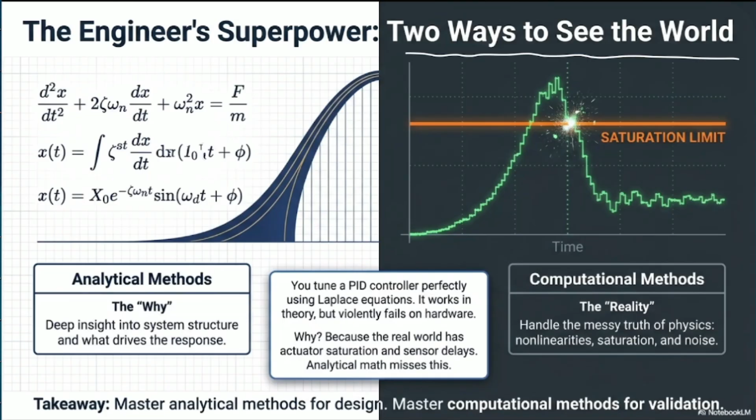So as I just mentioned, in this chapter, we would like to talk about the superpowers. We would like to see the two ways that we see the world. If you guys remember, in the previous chapter, we talked about the time domain that most of the time we don't like, because it leads us to computational mathematics, and we would like to move to the frequency domain. The reason we do that is because it's simpler, and if we have a couple of systems working side by side, we can deal with it.

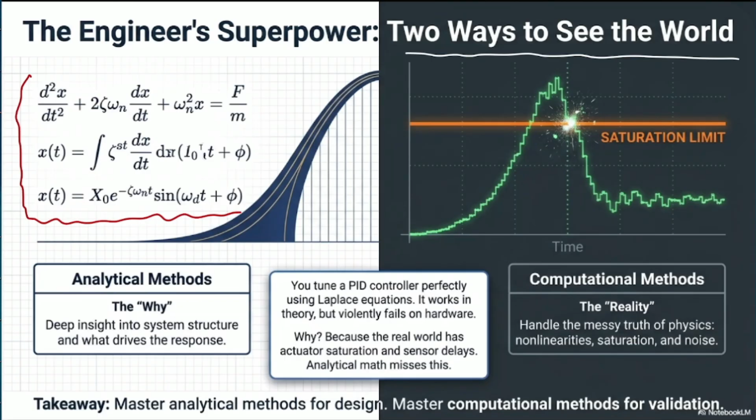After some point, we saw that we had some limitations, especially when trying to implement it in the real world. We had saturation problems and so on and so forth. So in this chapter, we are going to dedicate much time to that. Again, let's have a little review. Why do we use the Laplace? Because the Laplace was actually a wormhole.

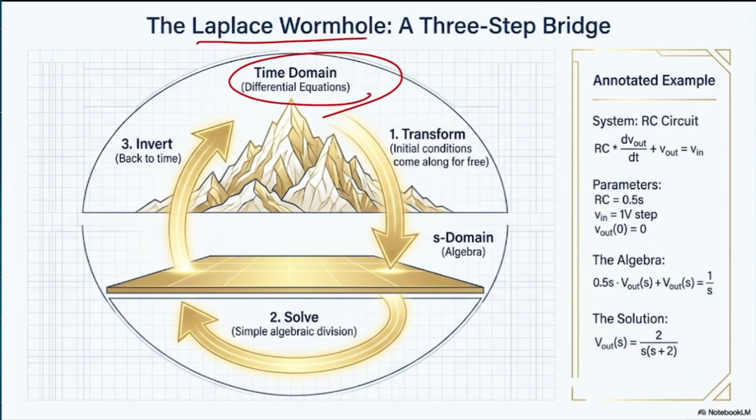It means that at the beginning, we had the time domain with the differential equation. We saw that everything was challenging, so we have to use the transfer function. For the transform method, we consider that initial conditions come along for free, and then we move to the new domain that we call the S domain. So at this point, instead of using calculus, we are using algebra. And then we solve it, which means we are trying to find the relationship between input and output. And at the end of the day, we still have to go back to time, because we have to see, based on the inputs, what I get for my output.

The very simple example was the RC circuit. If you guys remember, the relationship between input and output was something like this: R times C times dVout/dt plus Vout equals Vin. For our parameters, imagine that RC is 0.5, Vin is 1 volt, and Vout is 0 as an initial condition.

So for the algebra, we have to convert this using the Laplace transformation to the S domain. So at this point, I have 0.5 times S Vout(S) plus Vout(S) equals 1 over S. So I know that Vout(S) is going to be 2 divided by S times (S plus 2). So based on a specific input, which at this point was only 1 volt, I know that Vout is going to follow this one.

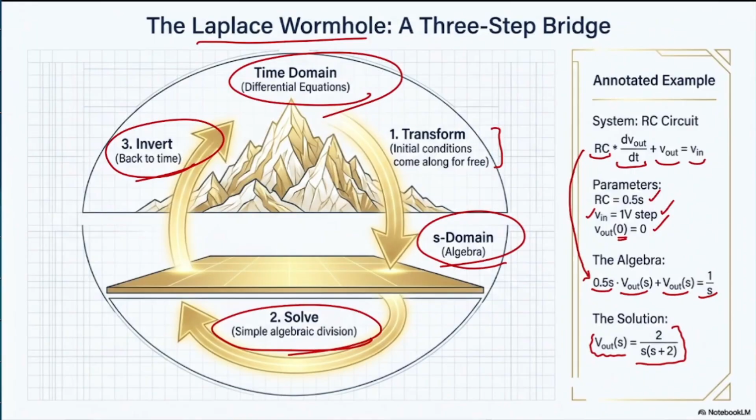So if I would like to talk about that a little bit more, I have to see what would happen to the math, because we saw that we solved V out in the frequency domain, but I still need to have it in the time domain, because the time domain gives me the whole diagram itself, and I can understand what would happen to the rise time, the steady state time, the overshoot, and anything else.

So the math over here was that V out equals 2 divided by s times s plus 2. This is going to be partial fractions. It means that if I would like to convert it to a form that I can convert back to the time domain, I have to divide it into 2 fractions. And when I do that, you guys know that 1 over s in the frequency domain is 1 in the time domain, and 1 over s plus 2 is e to the power of negative 2t. So, based on the input of 1 volt, my V out is going to be 1 minus e to the power negative 2t.

So based on the RC circuit, we know a couple of formulas: t of 0.5 second is considered 1 tau, because tau for the RC is just RC itself. And after 4 or 5 tau, the capacitor voltage is going to reach its maximum. So the insight from this diagram is that 3 lines of algebra precisely reveal the 2 seconds settling time. Imagine that in this scenario, instead of having the RC as 0.5, I have the RC as 1.

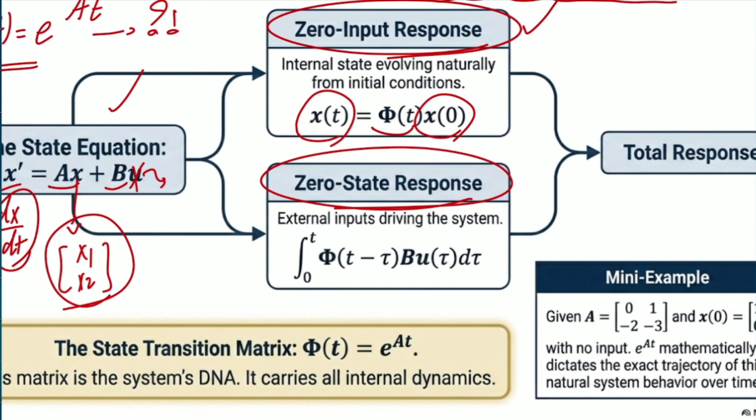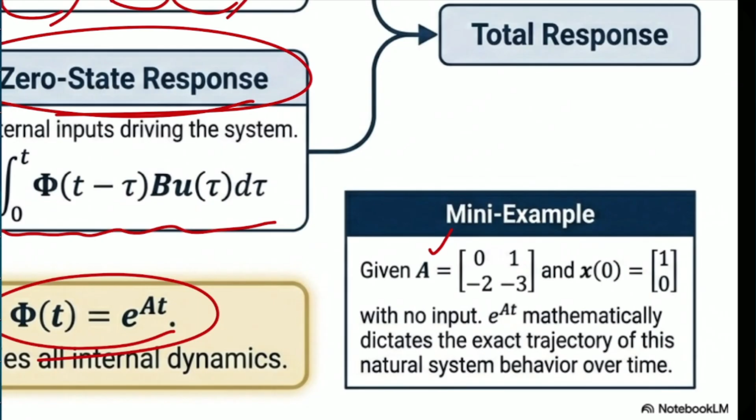And if I assume the zero input response, the part of my e^(At), or the part of my state transition matrix that we know as this guy, can just be calculated like that. So imagine that I have an example, and in my example, the matrix A, or the DNA of the system, is 0, 1, -2, -3, and I know that the initial state is going to be 1 and 0. So at this point, we would like to find e^(At), and let's move forward.

So in this kind of question, the very first thing that we have to do is to find the eigenvalues. If you guys remember, when we have the matrix, our eigenvalues are going to play the role of poles, just like in the S-domain function. We are going to have lambda 1 and lambda 2, which again play the role of the poles. So how can we find that?

It's simple. The only thing that you have to do right now is find this matrix, which is A minus lambda times I. A is the matrix that we have. There's no separate lambda 1 and lambda 2 here, because if you do the next step, lambda itself is going to enter a quadratic equation, and then you have two lambdas. So lambda, 0, 0, lambda is like a diagonal matrix, and it's the combination of lambda and I. I is just the identity matrix, and by multiplying these two, I have that guy.

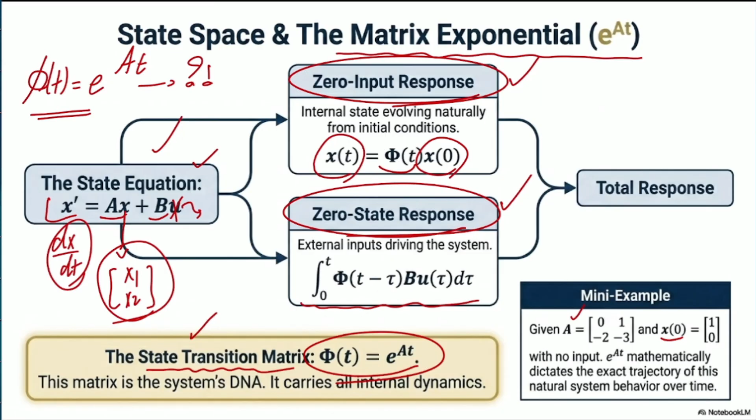Let's again look at the question. At this point, we would like to find the matrix exponential, or the state equation. Based on the superposition, the zero input response, and the zero state response, we can find the state transition matrix, and we can use it to find x itself.

So this way, you can again reach the place where you have the 2 by 2 matrix, and for each entry you're going to have one fraction. Since you have one fraction, you still have to convert it into two fractions for each of these. And then when you have your s response, you can simply find your time domain response. So again, with these two ways, we're looking at how we can use the normal time domain way, or use the s domain.

To the time domain, as you can see, the Laplace would be a little bit faster. At this point I had planned to solve it for you, but I believe it's not that challenging and hard.

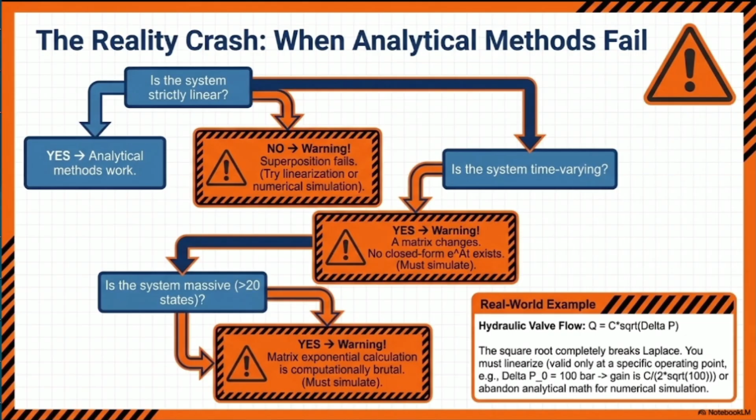So the reality check, because when we are talking about systems, obviously not all systems are going to be the same. At some point the systems are going to be linear, and at some point nonlinear. But right now we do have the path, we do have a route. We can answer a couple of questions and see what would happen next, and how I can use it for myself to have a little bit of prediction for my future response. So that's why we have something like this. Let's look at this flow chart.

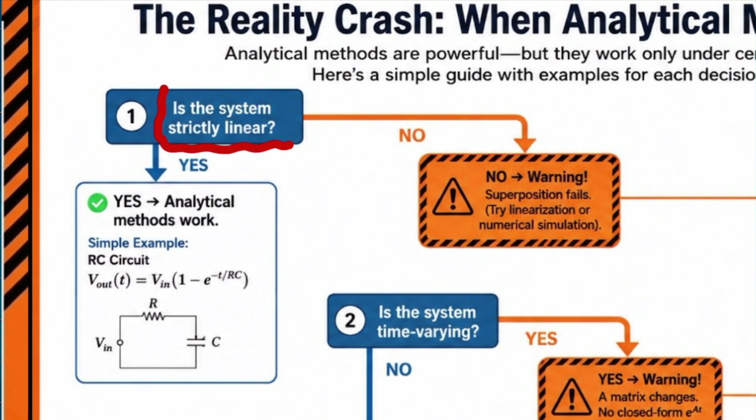So the very first question that I have to answer for my system is: is this system going to be strictly linear? As I just told you, it's very important to consider this fact. If the system is linear, that's fine, I can use superposition, that is good. So if my answer is yes, it means...

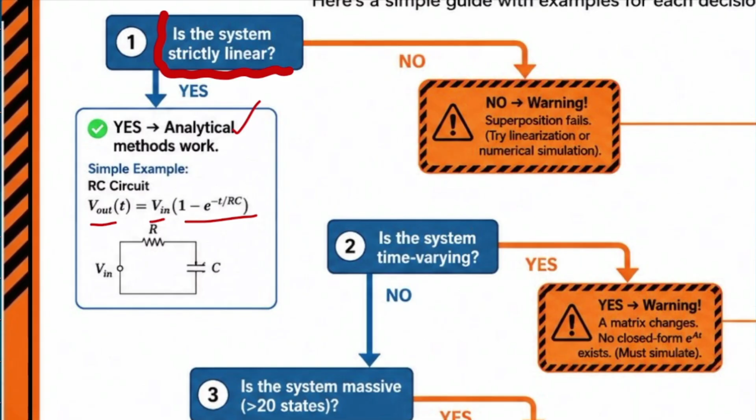...analytical method works. So imagine that we do have the RC circuit that we use all the time. The V out is going to be Vin times 1 minus e to the power negative t over RC. So I can use the superposition based on the input, some kind of zero state and zero input.

But if the answer is no, it means that superposition fails. As I just told you, superposition only works for the linear system, but that doesn't mean we have to stop. No, we are going to use methods that we call linearization or numerical simulation. So at this point, I'm going to consider very small points.

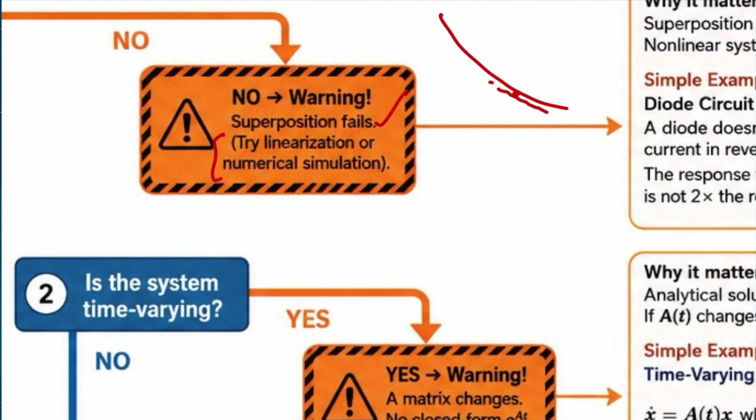Imagine that I have a dynamic system like this, but I'm going to find the specific small point. At this point it's going to be linear. I'm going to do any kind of simulation or calculation based on that.

Imagine that you have the circuit, as I just told you, a diode is going to be considered as a nonlinear component, and at this point I cannot do the superposition by itself. It means that superposition, as we know, adding effects, works only for linear systems. So a nonlinear system is going to break the rule.

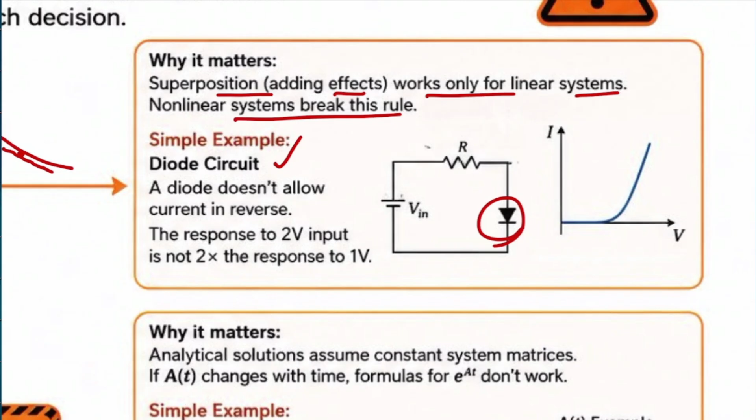So a simple example again is going to be the diode. A diode doesn't allow current in reverse. It means that the response to a 2-volt input is not going to be simply 2 times the response to 1 volt itself. So another question that I have to ask myself - by the way, when I talk about how we can make the system linearize, I'm going to talk about a couple of ways that we can do it.

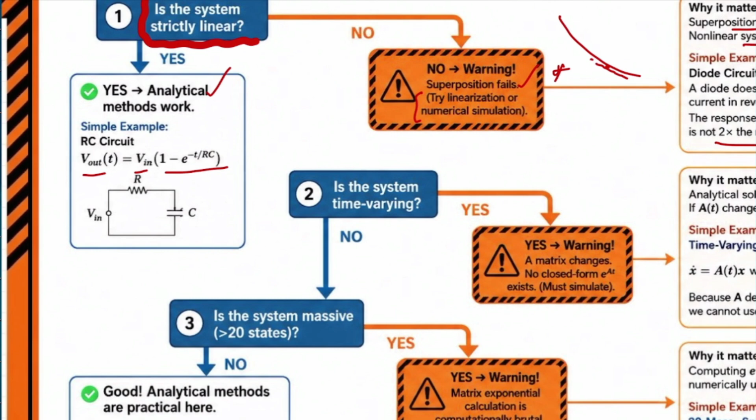So, is the system time varying? That's another question I have to ask myself. If the system is time varying, it means that the matrix is going to be changing all the time, and we don't have any closed form of e to the power of A of t.

e to the power of A of t just assumes that the matrix A is going to be just numbers. As we saw, the matrix A was 2 by 2, for instance, was just numbers. It wasn't an equation, or some kind of output that's going to change based on time itself. So the very important thing to consider here: the analytical solution assumes constant system matrices. If A changes with time, the formula for e to the power of At doesn't work.

Imagine that you have a system where x prime, the rate of change in x, instead of just being A times x, it's going to be A(t) times x. So at this point we have A(t) like this, and at the end of the day I cannot use the analytical solution because my A(t) is not something constant, it is changing over time.

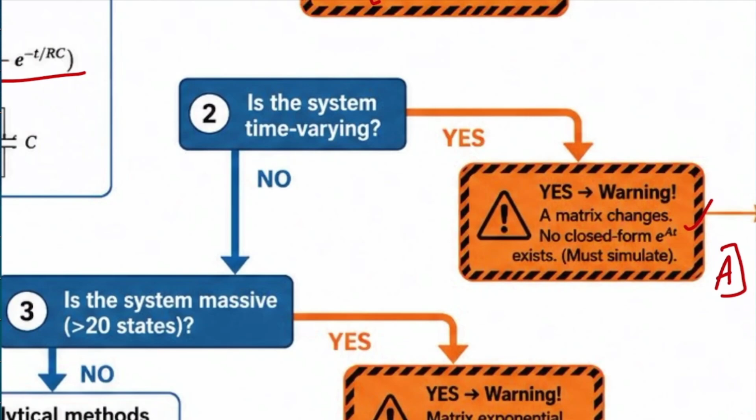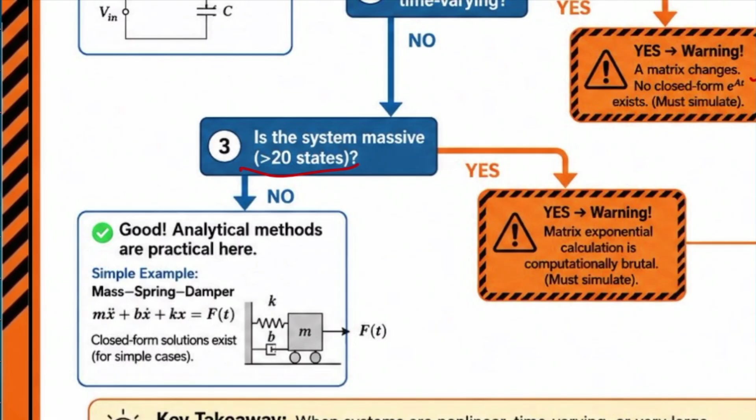So if the answer to this question, is the system time varying, was no, we have to ask another question for ourselves: is the system massive? It means it has more than 20 states. If the system is massive, it means that I do have an issue.

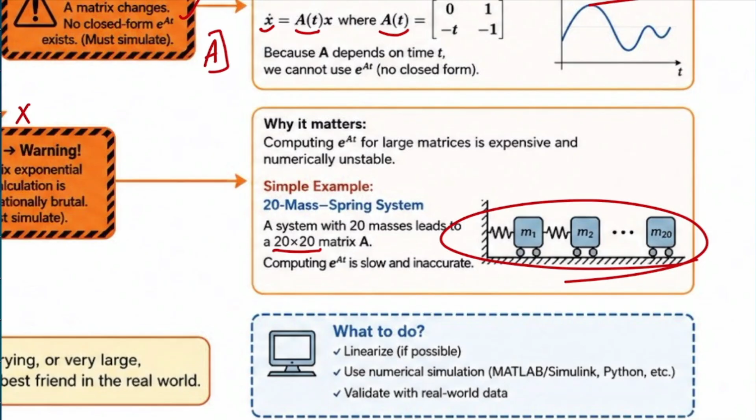Imagine we are talking about a very simple mechanical system, but instead of having maybe 1 or 2 components, I'm going to have around more than 20 components. So calculating this means I still can do that, but dealing with a matrix of 20 by 20 is going to be huge, and it doesn't work, or it doesn't seem worth it to do that.

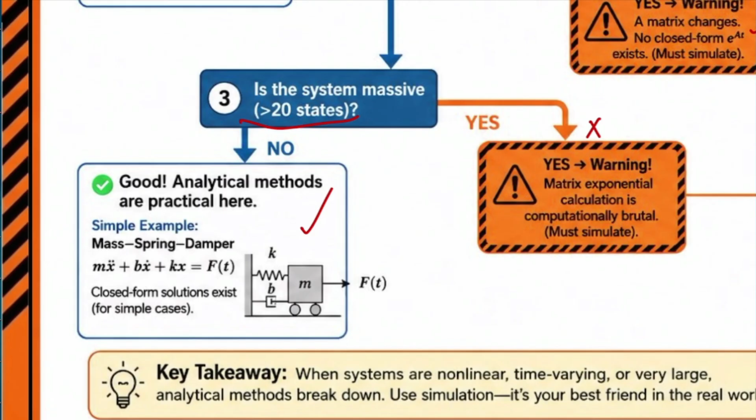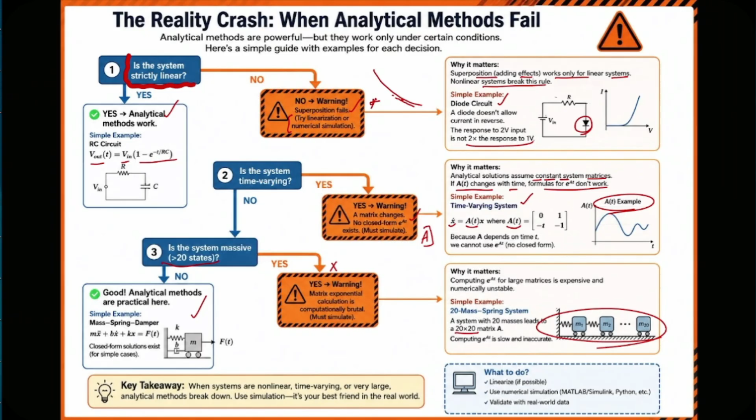If the answer was no, I still can do that, and the system is feasible itself. These are very important questions that you have to answer yourself while you're trying to do the simulation or the calculation. Today we are going to talk about a couple of ways related to linearization.

When we have a nonlinear situation like this, obviously I cannot solve it, or at least I cannot use the analytical method, using superposition or focusing on the Laplace transformation. So we are going to use a couple of methods in order to make a hypothetical linear condition.

The very first one is what we call the Euler method. Euler method would assume that all of these linear lines connected to each other to make this nonlinear curve are actually in the linearized part. It means that step by step, I assume that all of these guys are connected to each other.

Based on the very simple formula: x of t plus h, the next step of x, is approximately equal to x of t, the current step, plus h, which is my time step length, times f of x of t and t. And I can find my next step.

By doing this, somehow I can mimic my system to replicate the actual system while I consider that guy is linearized.

But a very important thing I have to consider is h, how much the length should be if I would like to capture all of those points. I want to make sure at the end of the day my system is the same as it was, because I don't want to use linearization or the Euler method and ruin my system. At the end of the day, I'm doing this to simplify my work, but I would like my output to be as real or actual as it was.

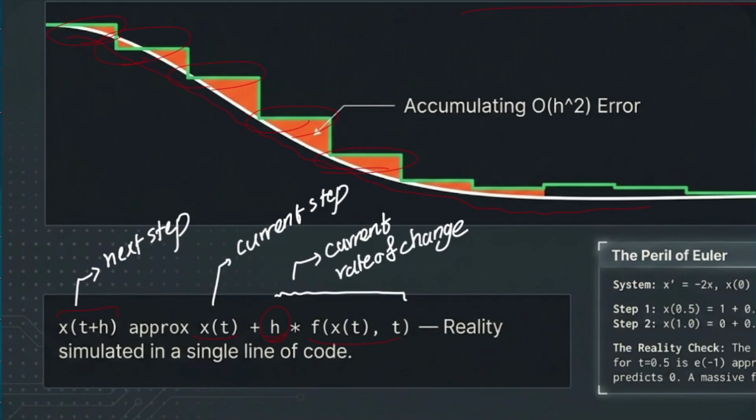Imagine we have the system x prime equals negative 2x, and x0 is 1, and I choose the step size as 0.5. So x of 0.5, the next value for x, is going to be 1, which was the initial value, plus h times f of x of t, based on negative 2 and my current step, which was 1 itself. So I'm going to get 0.

And for step number 2, if I still do that, I'm going to have 0. So you see that h equals 0.5 is not going to give the actual value, because it's not useful - my step 1 was 0 and step 2 is 0, so I'm not moving anywhere. It doesn't work. That's why I have to make sure the step size I'm choosing is the right one.

The exact analytical answer for t equals 0.5 is actually e of negative 1, which is approximately 0.368. And the Euler method confidently predicts 0. So this is a massive failure due to step size.

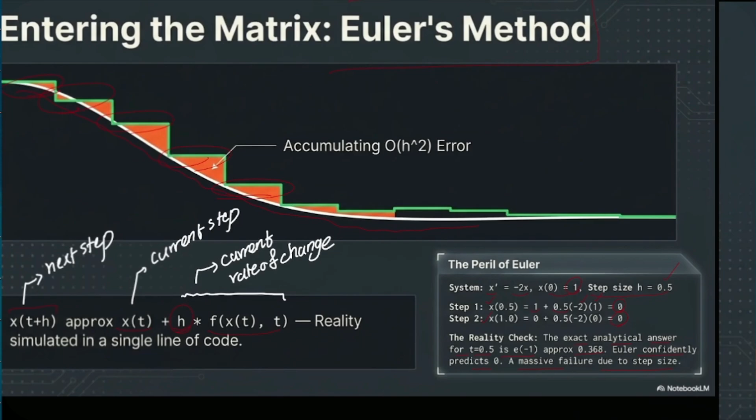Remember, we cannot choose whatever step size we have. Why? Because if I choose the step size of 0.5, I get a system like this. While this white line was the actual value, the green one is going to replicate that. But since the step size is so high, my system is going to be unstable itself.